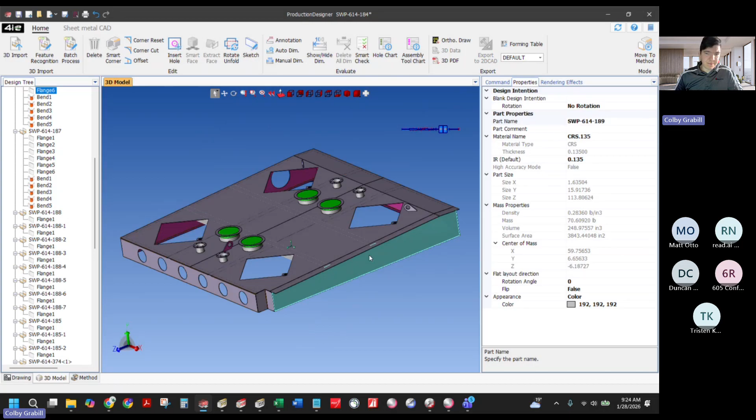We'll look at the first option for splitting apart, I guess, is what that would look like. Let's say it doesn't really matter which one we look at. Well, okay, let's look at this first.

So when I'm looking at this assembly here, and I'm wondering if there's any parts that are too large, I can select this Smart Check option. What this is going to do is analyze this entire model and determine if there's any holes close to bend lines, or any bending interferences.

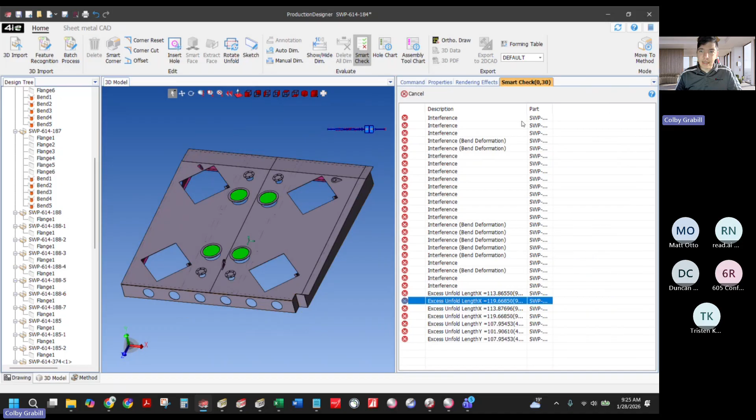Bending deformations, or like here it shows excess unfold length. This is saying that the flat pattern of that part is possibly getting to the point that it's going to be a little bit too large for nesting.

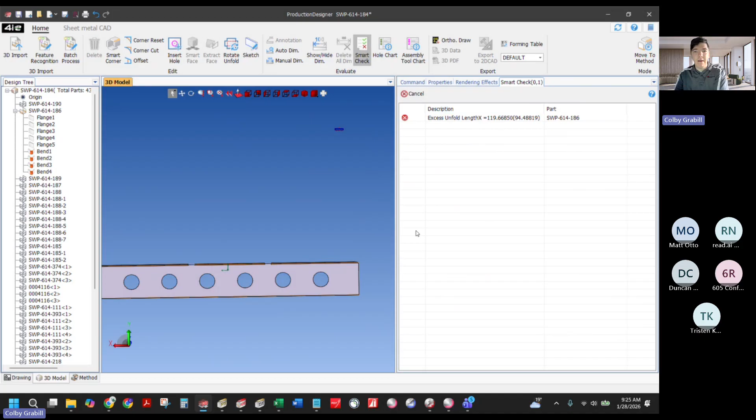So this shows me the part that is 614186. I can grab that part, hide others, and look at it, and then I can see, okay, this one's the unfold on that, and the X is 119.66 inches, which could potentially be too large for a standard machine. So it does give you that information.

If I did want to split that directly right now with this, before we go into the nesting engine, what I would do, or what I decided here, is to select the component. So let's see here, cancel out of here.

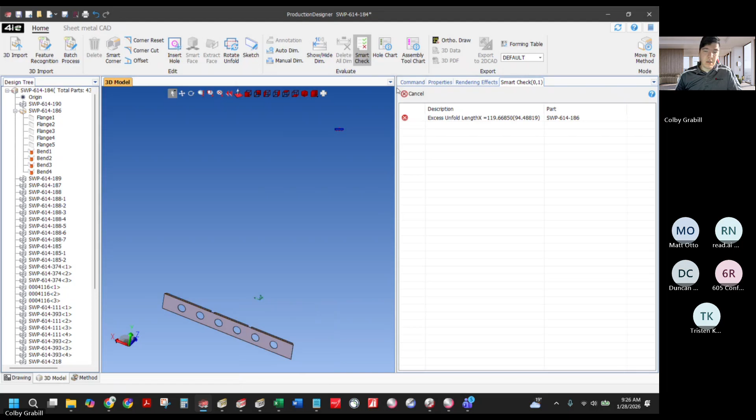So we could basically make two versions of this part essentially, like half one and half two.

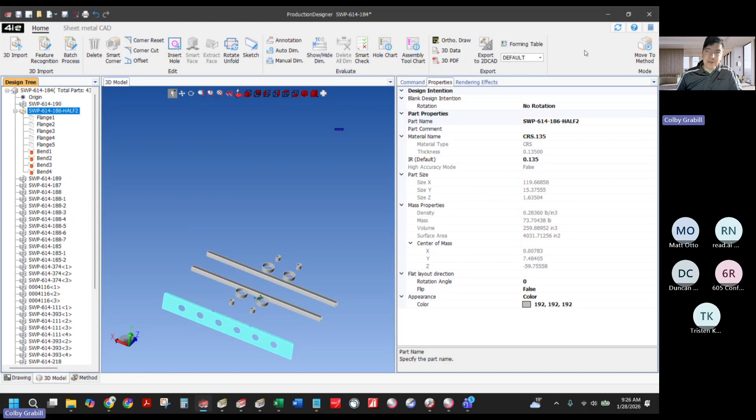And then over in this section, we've got this menu here. There we go. We're in our flat pattern. We have some sketch tools that we can use.

So you could go into sketch here, and you could draw a line and trim it, and then trim this bend line.

So, I mean, again, I would prefer to use SolidWorks myself, but that's not to say that this isn't an option.

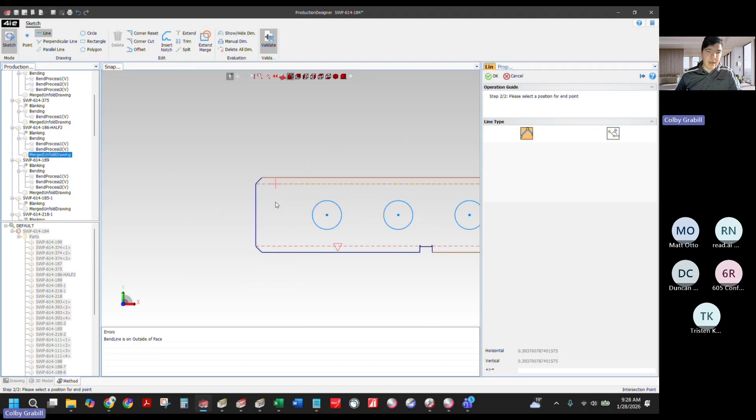This line here, I have to add that one back in again, because this bend line becomes a single structure.

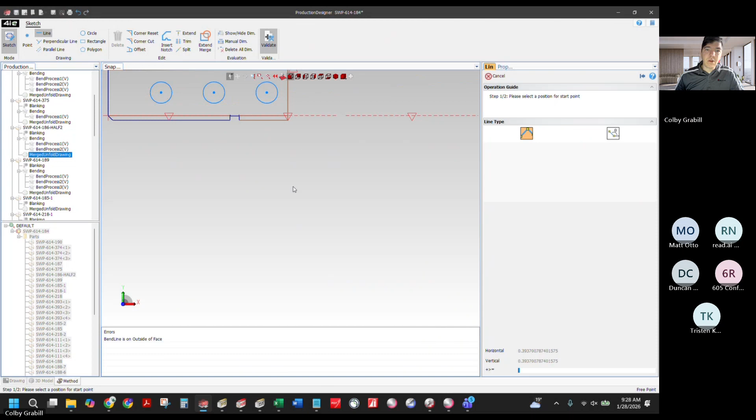This is one option now, and obviously this is actually changing the model itself. I'm going to show you another method that we could do this that doesn't change the file, which is what I preferred, but I just want to show you that this is an option here at least.

So I can go out of that sketch and then select these lines and convert back to a bend.

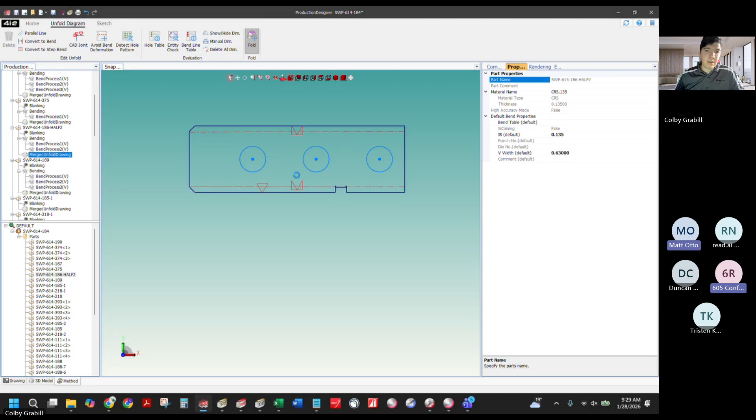So did you save this as another part file? Is that how that worked? You did that, and then we get a half part basically, and then you would do that same thing for the opposite half.

Okay, so that's as far as the actual modeling, drawing tools within Production Designer, which is what I think you were describing, like just staying directly within this application and physically changing the geometry. That's basically what the geometry manipulation tools look like within this software.

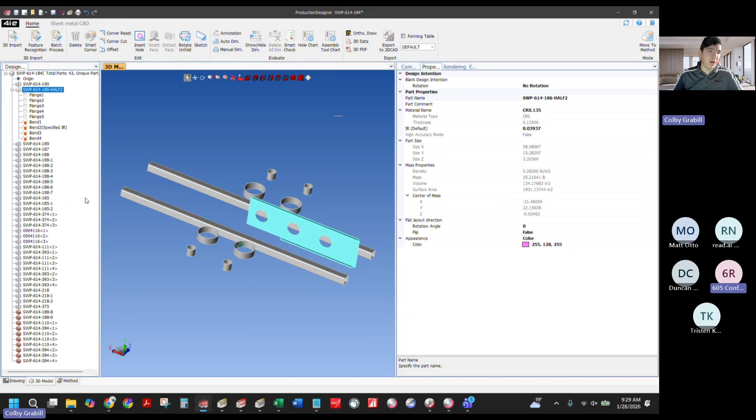It's not intended to be a design software. Sure. So that's kind of the tools that we're provided with in this application.